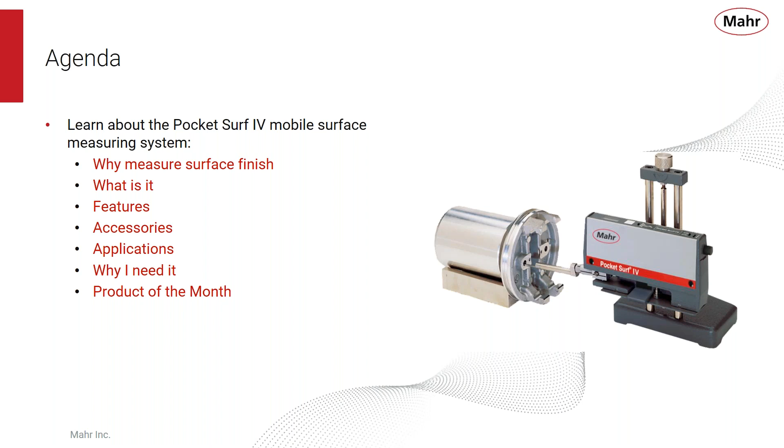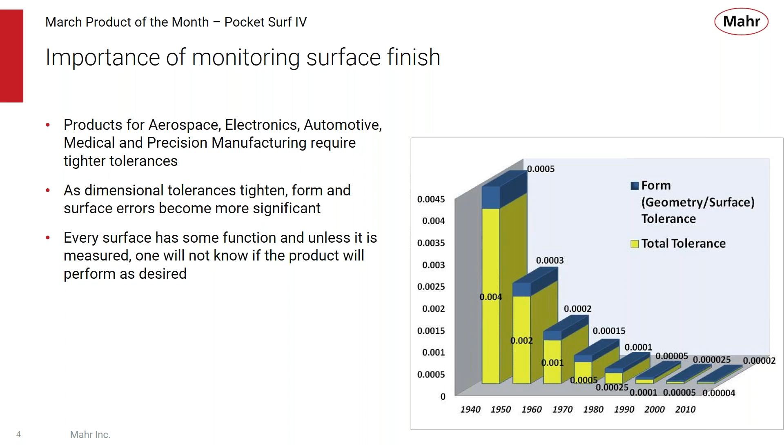Why is it important to monitor surface finish? Products for aerospace, electronics, automotive, and precision manufacturing have seen a revolution since the 1940s and 50s, where tolerances have become tighter as higher performance is required. As dimensional tolerances tighten, form and surface finish errors become more significant. Every surface has some function, and unless it is measured, one will not know if that product will perform as desired. This chart shows how tolerances have gotten smaller since the 1940s and 50s, and even a small form or surface finish error can be a big percentage of the tolerance and affect how that part performs. So it's important to monitor surface finish these days.

Surface function is another important reason for monitoring surface finish. Think about painting a surface. If that surface is too smooth, maybe the paint won't stick or adhere to the surface. If the surface is too rough, the coating may not coat it properly, and the rough edges will protrude over the coating.

Surface interaction is also an important reason for monitoring surface finish. Sliding surfaces should be smooth to reduce friction between two parts. But you might want to create a surface roughness with grooves for oil to fill in, allowing the surfaces to become lubricated and move smoothly against each other. It's also a way to maximize machining processes, allowing you to fine-tune the speeds and feeds of a machine tool to produce a target surface finish, so you're not over- or under-machining the part, and it also allows you to analyze problems with the machine. Maybe the machine is out of square, or the tool bits are loose, something that can be picked up by monitoring surface finish.

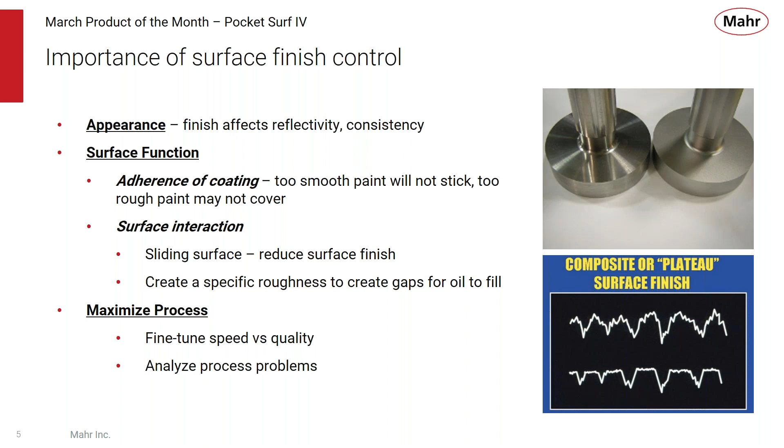Surface finish comes from the manufacturing process. Think about a lathe, for example: it has a cutting tool, bearings turning the spindle, a pulley, a motor, gearboxes and so forth. All those parts of that machine can imprint themselves onto the part being machined. So roughness comes from the tool marks, vibration can cause a waviness-type element on the part, and straightness comes from the form characteristics of the machine. When you put all those together, you get a total profile of what that surface might look like.

Most machining processes produce these three elements, but roughness is the one that's probably the most influential.

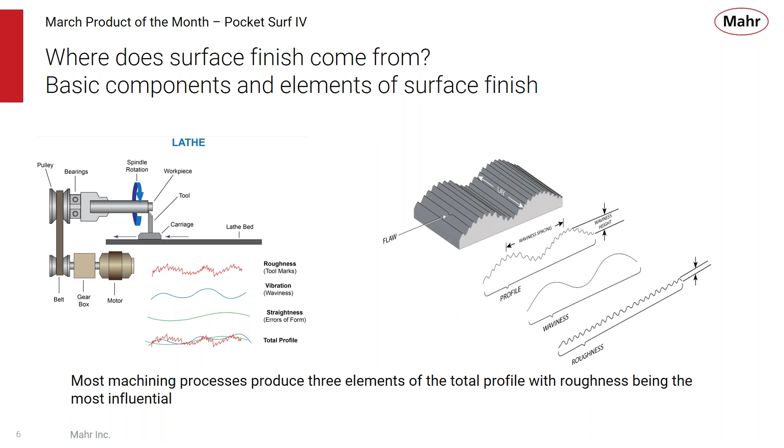We've been measuring surface roughness for a long time, but we haven't always done a very good job. In the very beginning, we had scratch standards, where people used their fingernails to get an estimate of how good the surface would perform. That was a good start, but people just don't measure things the same way using those techniques. So today there are some very sophisticated methods for measuring surfaces. Most use mechanical contact, but there have been some good breakthroughs recently for optical measurements that can correlate very well with a mechanical contact system.

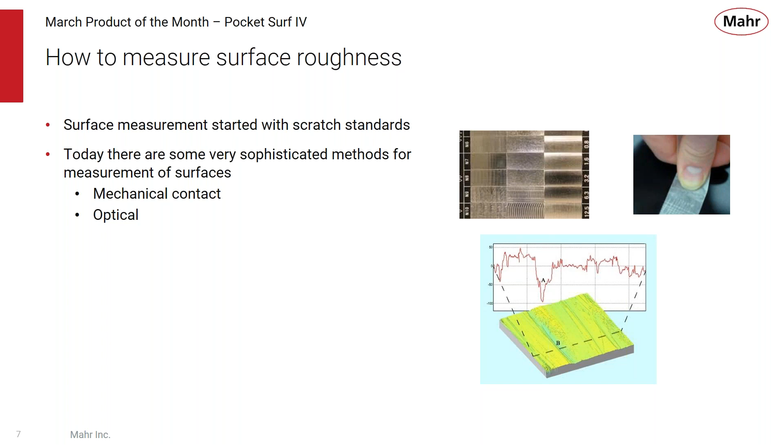A skidless system allows you to see the roughness, waviness, and profile, where a precision straightness datum built into the drive system moves the probe back and forth over the sample being tested. The reference datum in the drive is actually what the surface finish is compared against. With this type of system, you can measure the waviness and profile besides the roughness of the part.

So Mahr provides both types of surface evaluation measuring instruments. Most portable roughness instruments use the skidded measurement technique, but Mahr does also provide a skidless portable measuring instrument.

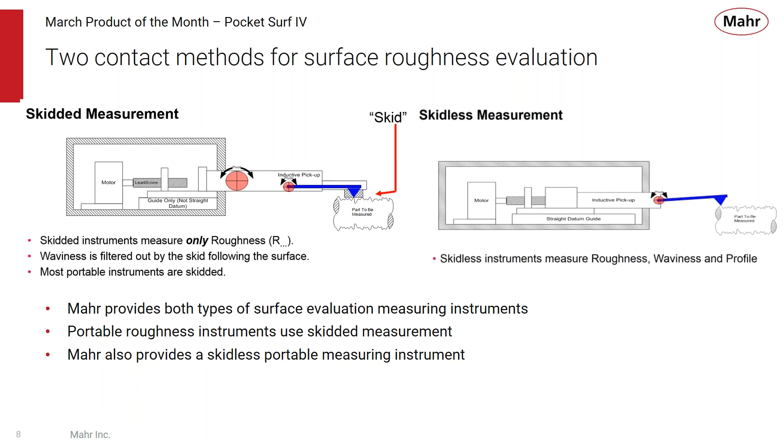Now, when you look at surface roughness, there are nearly 100 parameters that can be used to evaluate surface finish. They serve different functions for checking the stability of manufacturing processes and the functional characteristics of surfaces. You can use these parameters to look at the analytical capabilities of the instruments. So there are lots of different parameters out there, but most things come down to what the average roughness is, and the most common parameter is roughness average.

Since the roughness profile contains peaks and valleys, this averaging method is most commonly used to qualify the surface. It gives us a good general indication of what the surface is doing. It's easiest to understand and visualize, and you can easily quantify it with a single number. So for example, if somebody asks you what the surface finish of that part is, you can very easily tell them that the roughness average is 75 microinches, and people can understand that.

The higher the number, the rougher the surface. The lower the number, the smoother the surface. So it's a good way of quantifying the surface roughness.

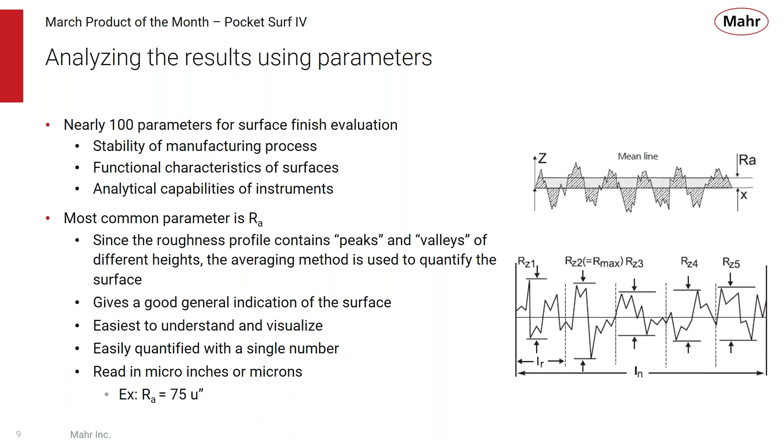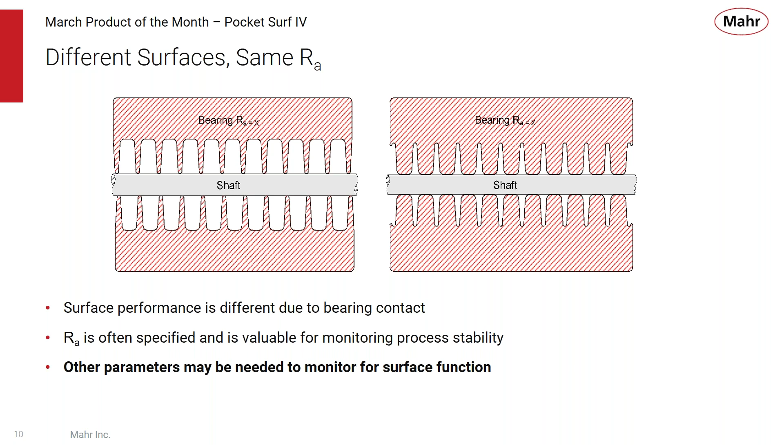So RA is often specified, and it's a valuable way of monitoring process stability, but there may be other parameters out there that can be used to monitor the actual surface function. Still, RA is by far the most commonly used parameter.

But let's talk about the Mahr product of the month, the Pocket Surf 4. Now, people have been measuring surface finish for a long time, and the common practice was there was a lab in the back of the plant somewhere where people might take their part to very sophisticated surface finish test equipment, make the measurements back there with highly skilled technicians to get the roughness average. Well, a lot of time was lost in that process.

Now, today, there are portable devices that can be brought to the point of manufacture, and surface finish measurement can be done right where the machining process is, giving people immediate results. They're fast and easy to use, and you don't have to be a skilled technician or a quality control person to use these portable surface finish devices.

So the Pocket Surf 4 is a pocket-sized, economically priced, completely portable instrument. It can be used portable by itself, or it can be bench-mounted. It performs traceable surface roughness measurements on a wide variety of surfaces. It can be used in production on the shop floor, or in the laboratory. It's really meant to be used at the point of manufacture.

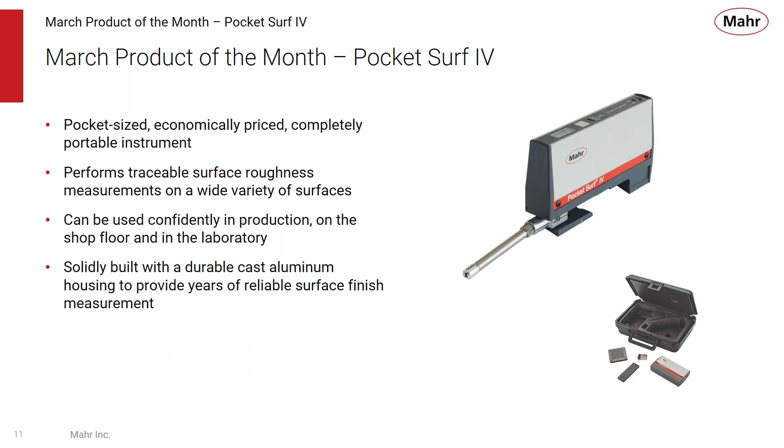This is shown by its durable cast aluminum housing, which provides years of reliable surface finish measurements. You don't have to worry about things becoming loose or plastics becoming cracked. This cast aluminum frame really solidifies the measuring system.

Now, the Pocket Surf 4 isn't something new. It's been around for many years. In fact, the first Pocket Surf was introduced in the mid-'80s. And you can see here's a picture of an old catalog.

It was really the first self-contained pocket-sized surface finish system. There were other devices around at the time. They were quite fragile, with cables between the drive and the display unit, and you really had to be careful with the probing systems because they were so fragile. But the Pocket Surf packed surface finish measurement in a robust package that was meant to be used to make surface finish measurements at the point of manufacture. It really became, since the 1980s, the standard of the industry for measuring surface finish at the point of manufacture.

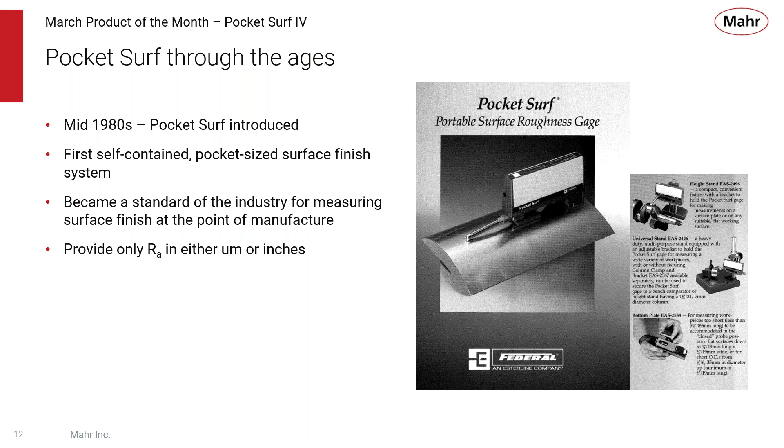The first one only provided RA, and you could choose the results in either micro inches or microns. But it had some pretty important features that we still see continue today. It had a simple one-button operation. You can choose micro inches or micrometers. It had a large, easy to read LCD display.

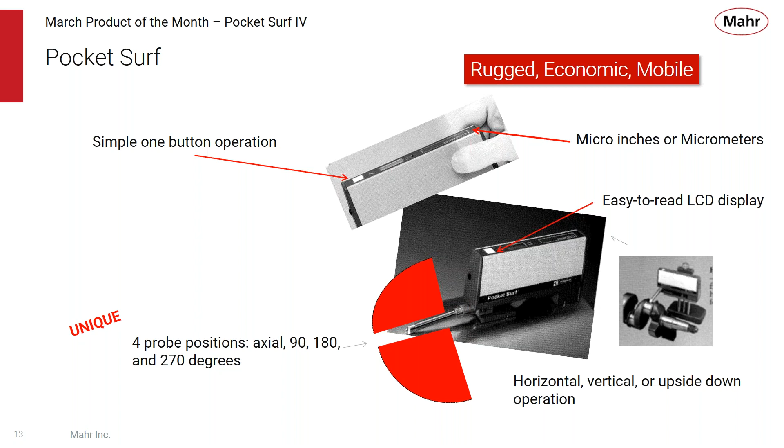And what was unique at the time is that the probe could be positioned in 4 separate orientations to really increase its versatility. So you can use it straight on, you can use it self-contained, you could have it pointing at the 90 or 270-degree position for lots of versatility. You can see the picture here of measuring the surface finish on the crown of a crank. So it provided lots of different capabilities, things that were unique at the time.

Then in the late 90s, Pocket Surf 3 was introduced. It had all the same features of the first Pocket Surf, but a little bit more. It really allowed for 4 selectable parameters. It had RA, roughness average, but also provided Rmax, which was maximum roughness depth, depending on whether it was the ANSI or the DIN parameter. And this allowed people to get an easy to look at burr or scratch control parameter.

So it kind of told you that there was a burr or a deep scratch. If it gave you a high number, something was wrong with that surface. It also provided RZ, which was a mean roughness depth, with a kind of cutting depth parameter. So again, a little bit more versatility with the Pocket Surf. Now you can kind of get the idea why it was called Pocket Surf 3, because there was a switch position on there for choosing one of these 3 parameter settings.

It also had 3 selectable traverse lengths, so you could choose how many readings within the trace for your results. It provided RA only in microns and inches. And you may think to yourself, well, what happened to Pocket Surf 2? Well, the key thing here was that Pocket Surf 3 had the 3 parameter settings, and so we skipped over Pocket Surf 2 with Pocket Surf 3.

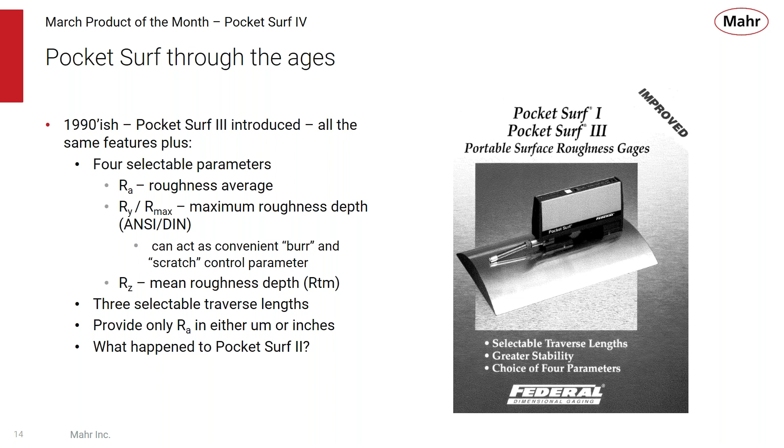So again, in the 90s, Pocket Surf 3 was introduced. It had the same basic shape and form and features as the initial Pocket Surf. And I think one of the key things is that you can see the start button was moved from the front of the product to more along the middle. That gave the product a little bit more stability when the start button was being pressed to start making a measurement. It was really over one of the V's or one of the feet, so it provided a lot more stable operation.

It had the 3 parameter settings, selectable inches or metric. It had selectable cutoff lengths, and we added data output to it so that now you can start recording the values from the Pocket Surf 3. We kept the 4 positions for the probe, and just like the previous model, you can use it horizontally, vertically, upside down, any way you want. Just place it on the part, and you can make a measurement. Plus, we also gave an H or an L indication if the values seemed to be too high or too low for the system. So great improvements for the Pocket Surf 3.

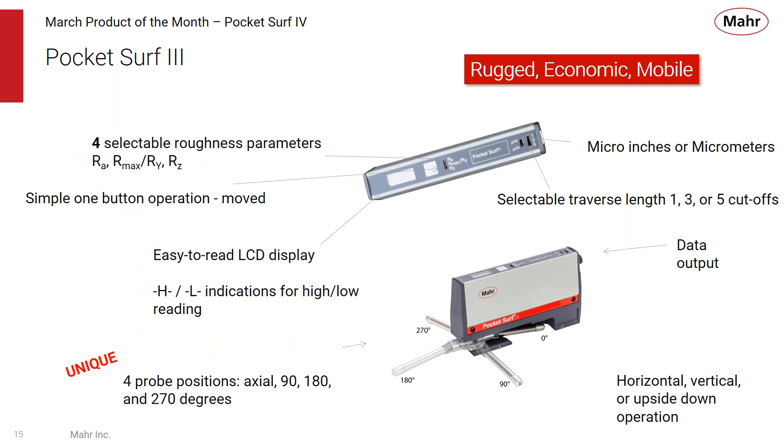But you can imagine that, even with a new product doing more features, the applications haven't changed that much. If you look at the stands, pictures and photos from the initial Pocket Surf introduction brochures, they're all the same pictures and applications that we have today. So whether we're measuring parts on the machine or in a stand, or grooves or small parts, we still maintain all those same accessories today.

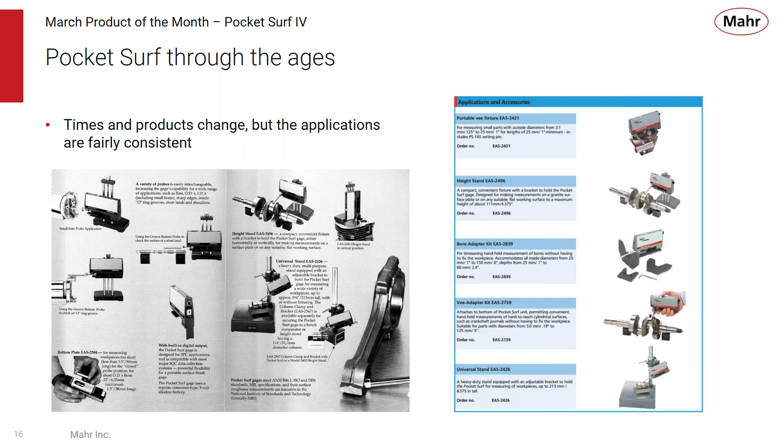And in 2014, we introduced Pocket Surf 4. There was really nothing wrong with Pocket Surf 3, but things change, electronics change, and some electronic parts become obsolete or tough to get. So it was time to update the electronics, and we did that with Pocket Surf 4.

It has all the same features, same easiest to use, simple 1-button operation, the 4 probe orientation. It uses all the same probes and stands and mounting accessories as the Pocket Surf and Pocket Surf 3, the same parameters, and the same operating parameters.

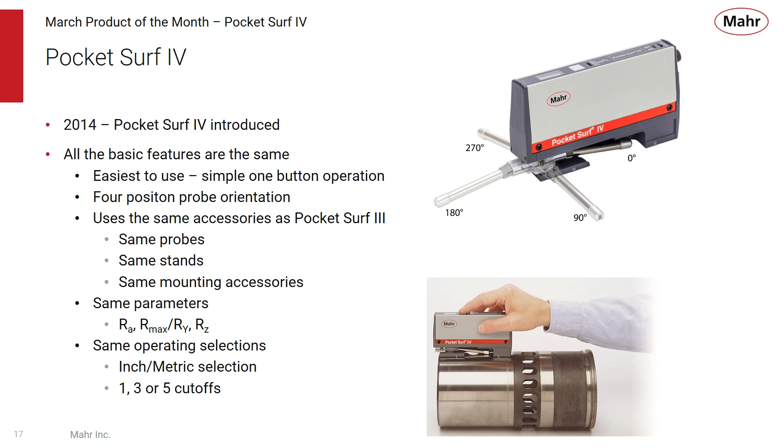But we did make some improvements. Instead of having the old calibration by screwdriver, we did calibration by a digital method today. So that makes it a little bit more accurate, less chance of damaging the system by pushing a small screwdriver through a hole in the side of the product. So it makes it a little bit more robust.

We also changed the output connector to be like some of the other Mahr products, like the µMaxum and our 2000 series comparators, so that there's a standard cable and it can be used with MarCom now. So a great way of getting data out of the product. We made the battery cable a little bit more robust, and inserted a strain relief that prevents breaking if pulled on when changing the battery.

And you have the ability to look at the other parameters after you've made a measurement. So you can make your measurement, look at the RA value, and then switch the product to Rmax or RZ within 7 seconds, and you'll be able to see those values. So you don't have to measure up to 3 traces to get the 3 results. You can do that with 1. All new features for the Pocket Surf 4.

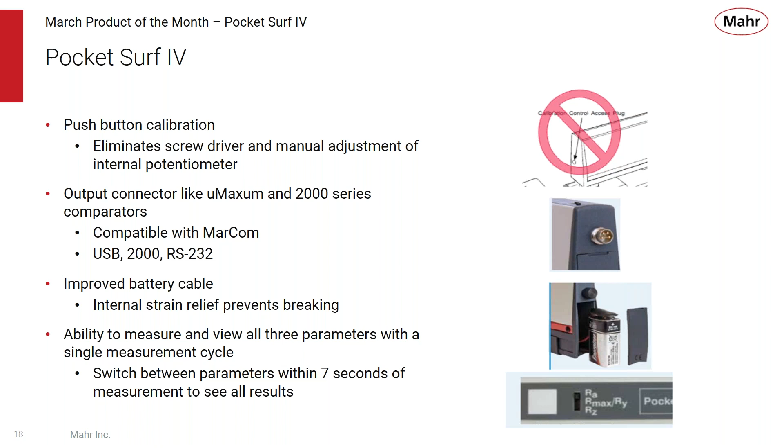And all the performance specifications are the same with Pocket Surf 1, 3, or 4. We have the same measuring ranges. The evaluation lengths are the same. Probe speeds are the same. So over the years, nothing has changed, and that's why customers really like the Pocket Surf product, because it's been so stable and it's packed with so many features.

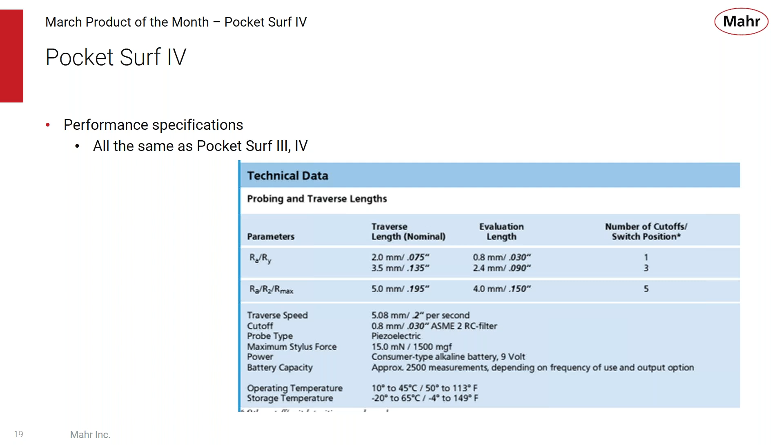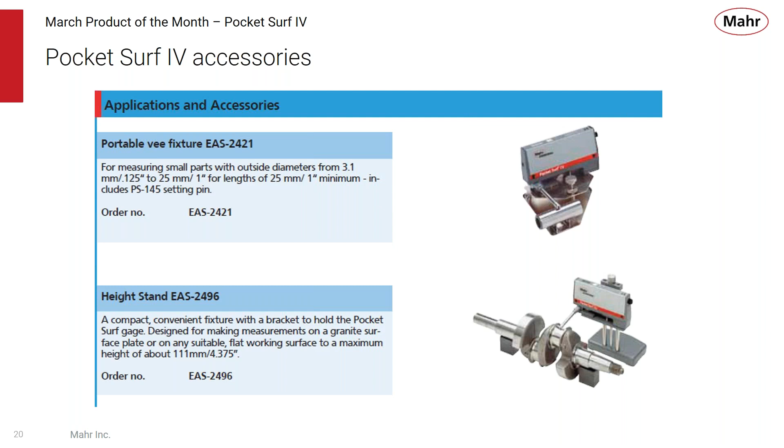Like I said, the accessories really haven't changed. So these are the same accessories we've had in the past. These are model numbers for these products. So you can see there's a little stand that allows us to hold cylindrical parts and measure the surface roughness across the top. We have a small portable height stand for mounting the Pocket Surf, great for being used on surface plates, moving it around and so forth.

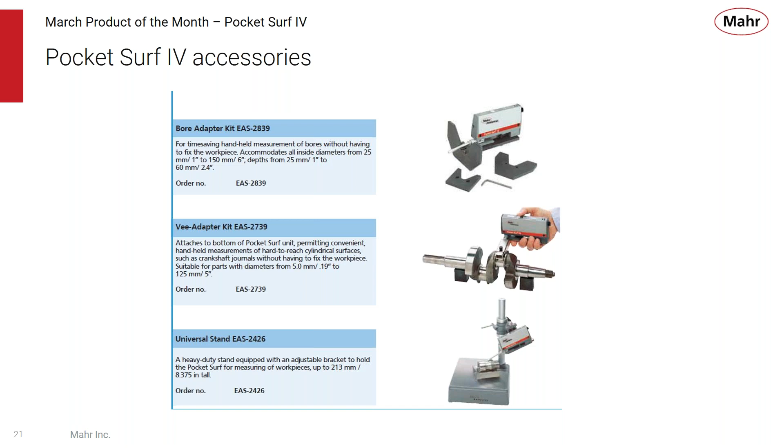We have a bore adapter kit so that you can help align the Pocket Surf in a portable application to bores in the engine blocks and so forth for small to large holes. A V adapter for portable use across things like crankshafts and so forth when you can't get a stand to that application. Plus we have a universal stand where it acts as its own reference, and you can angle the Pocket Surf to virtually any orientation to get the proper surface finish alignment.

There's a small bottom plate accessory, so you can use it as a portable way of measuring very small diameter shafts. We have a nice mounting bracket for use with say the 814 height gauges as a way of using the Pocket Surf on surface plate applications. And we have another portable stand that has a swivel built into it, again for measuring and getting the right orientation of taper type parts.

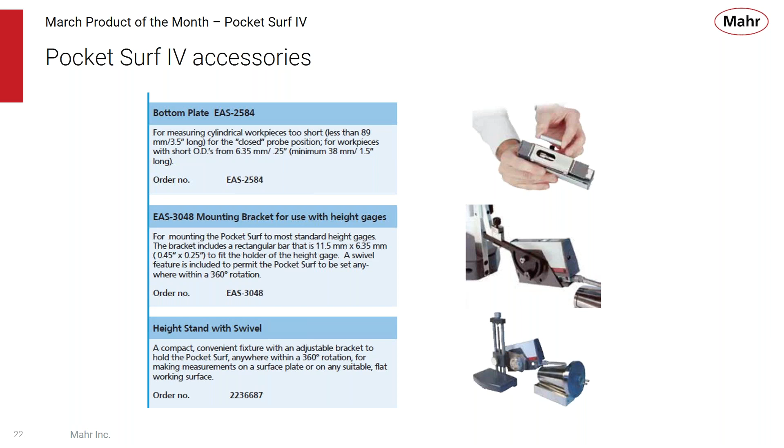All these accessories have been around since the introduction of the Pocket Surf. We also have some nice output or connectivity accessories with using our MarConnect and USB ready cabling, where we can take the data and connect it with a USB connector or the RS-232 connector. And of course, we offer free MarCom software to take this data from the Pocket Surf and put it into Excel or any other Microsoft-based product.

The probes and so forth have all been the same. We have our general probe, which comes in a 5 micron or a 10 micron radius, and those also come with the two kits that are available. We'll talk about those in a moment.

We have probes for going across the part when we're using the 90 or 180 degree position. So this allows us to ride over crowns, like in the crankshaft application. We have chisel probes for using the probes in the other orientation to hit that crown. We have a small bore probe, and we have a groove bottom probe. Again, all of these are mostly available in the 5 or 10 micron radius diamond contacts.

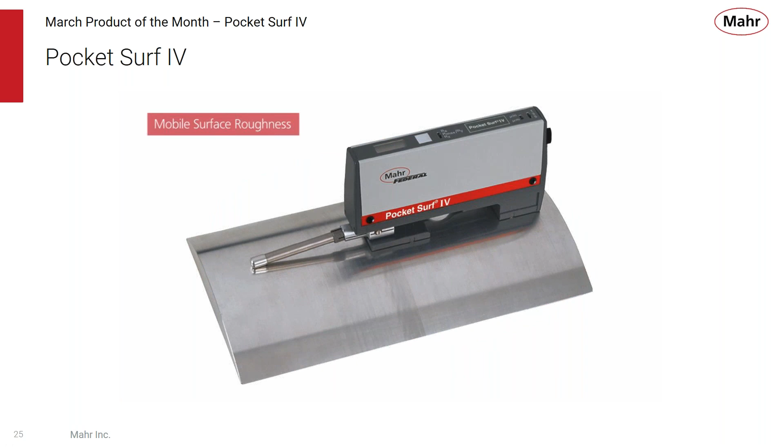Now let's see if we can show you this small video of the Pocket Surf being used. We notice that it's a mobile surface finish device.

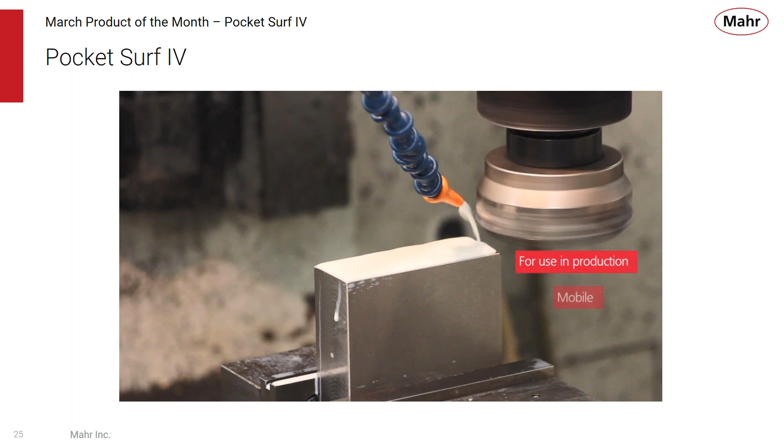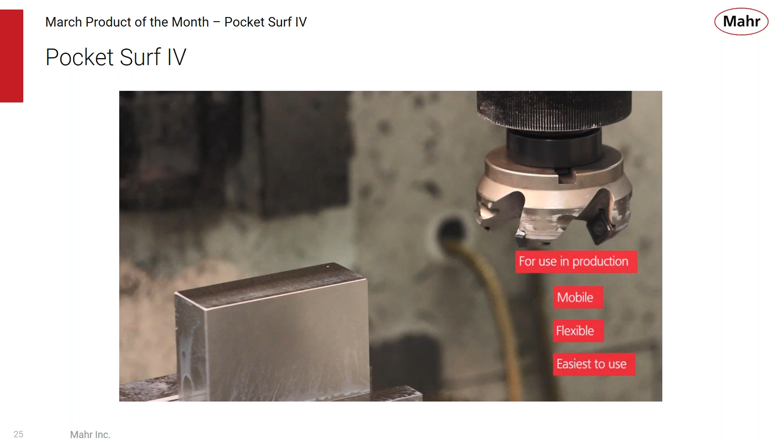Typical application would be for use in production, right at the point of manufacture. The part could be cleaned off, and the ideal application is to put the Pocket Surf right on the part at the point of manufacture.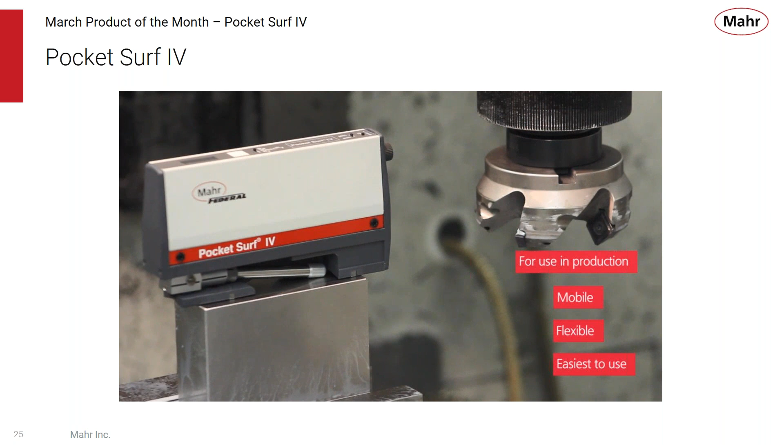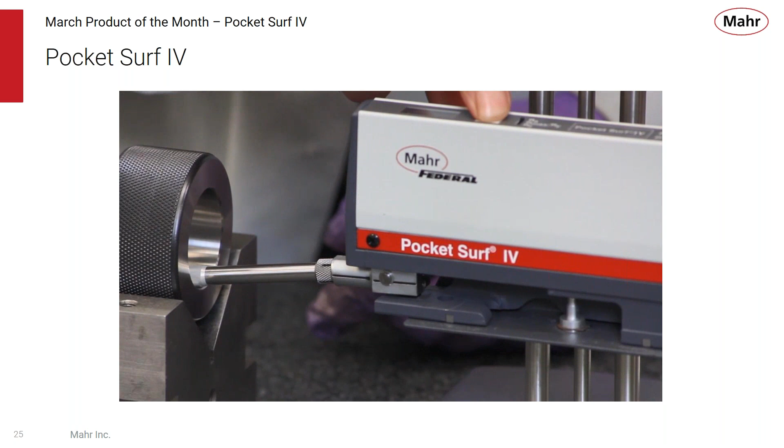Simple to operate, single button operation. Take your trace, get your results. Or the Pocket Surf can be used at the point of manufacture and the part being brought to the Pocket Surf. Again, an on-the-spot check of surface finish.

We talked about the single button operation, start button, large display to get your results, simple switches. There's no menus or anything to work your way through. These are all available with a fixed switch, choosing inch and metric for your parameters and for your cutoff settings.

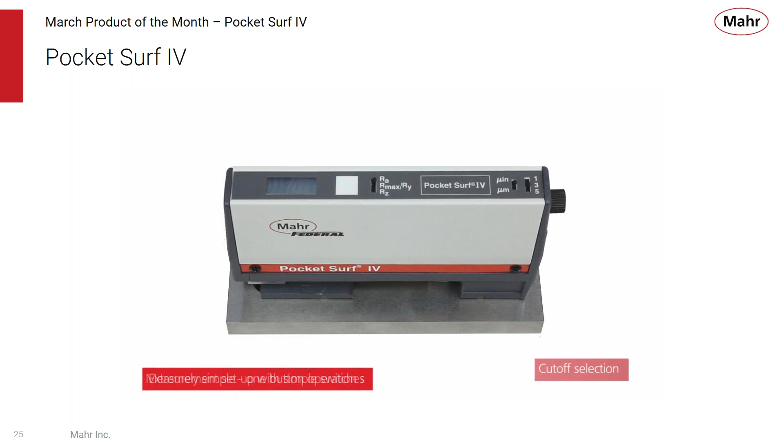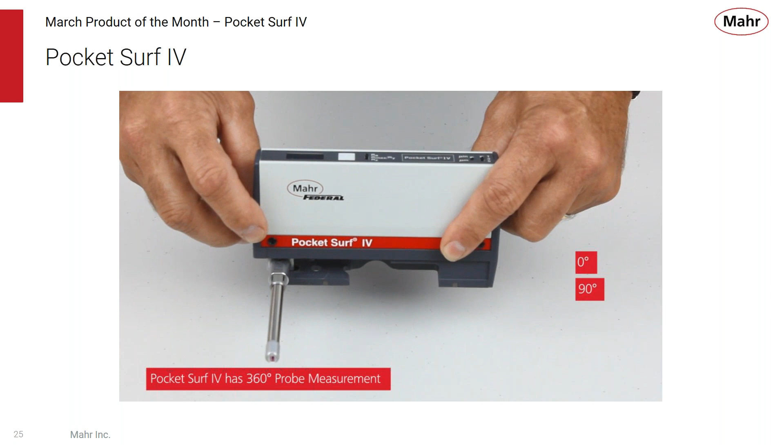And of course, the probe can be used in any one of the 4 positions: our 0 degree position, 90, 180, and 270. So this greatly increases the versatility of the product. Depending on the type of part, you can choose the right orientation and get the results that you need.

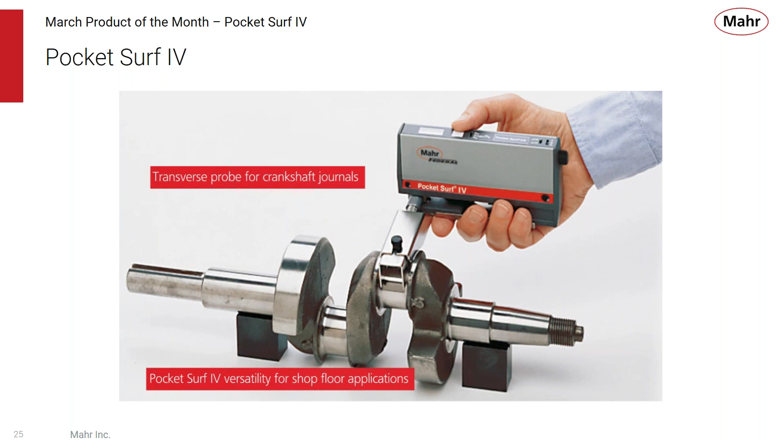Transverse probe on the crankshafts, different stands, ability to measure small diameters.

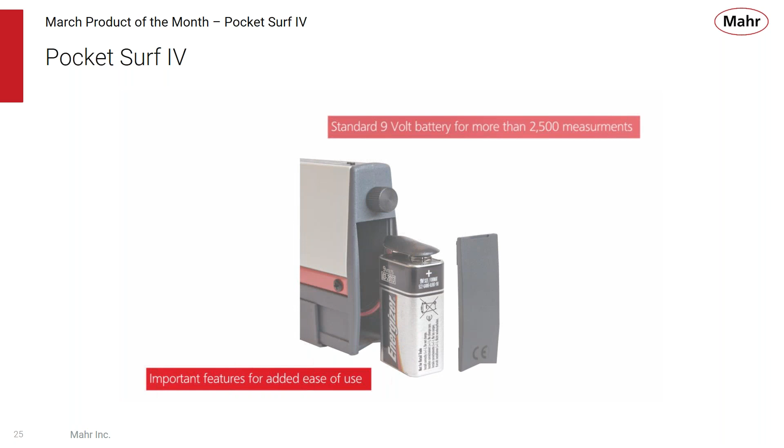Important features: it uses a standard 9-volt battery, getting 2,500 cycles from it. Use Mahr Connect to record and store your measurements, so it's a complete roughness measuring system when you purchase it. You get the Pocket Surf, the test specimen, battery, and a small calibration stand with it.

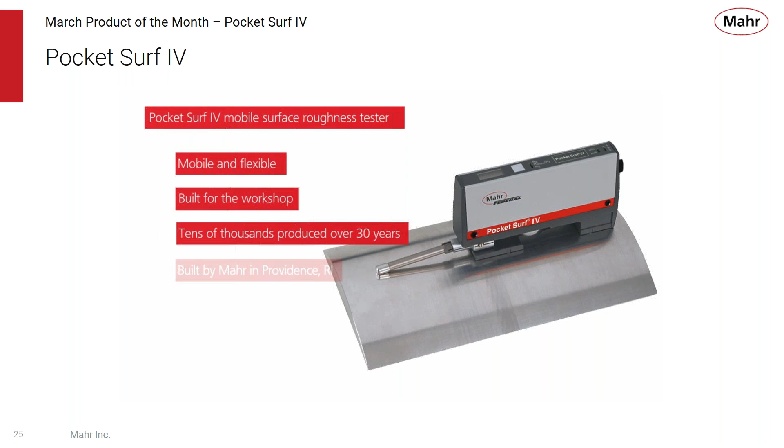So Pocket Surf 4 is mobile, capable of doing lots of different applications, built for the workshop. We've sold tens of thousands over the years, and it's built in Providence, Rhode Island. I think you'll find it one of the easiest portable surface finish devices to use.